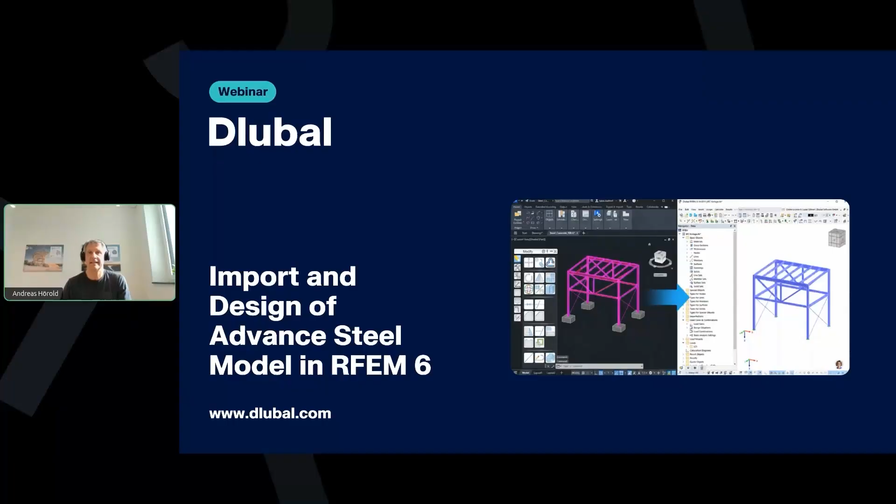Welcome to today's webinar. Today we will show you the import and the design of an Advance Steel model in RFEM 6.

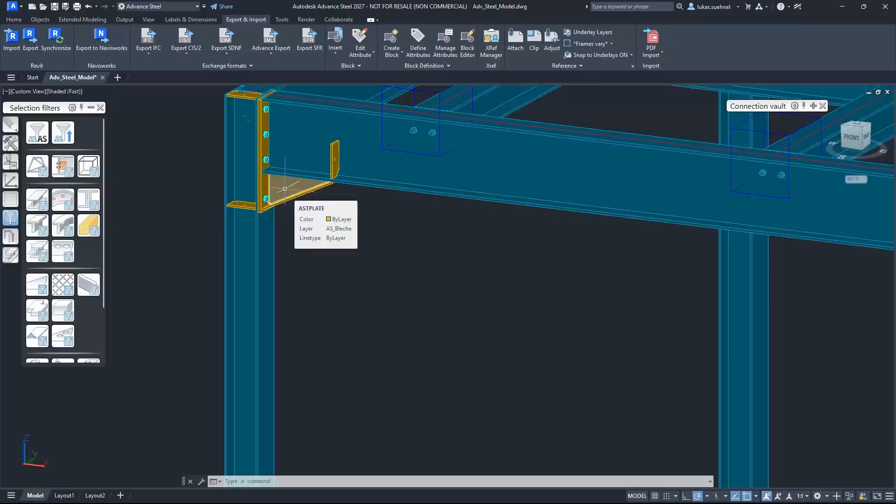The SDNF format allows us to export the beams, columns, so members in general, but it also allows us to export plates. So plates like here that are used in this tapering, in this connection, or here as stiffeners and so on. The question is, do I really need the plates in RFEM 6? And if I think a couple steps forward, I import this data into RFEM 6. I want to do an analysis on a beam model, then those plates won't help me at all.

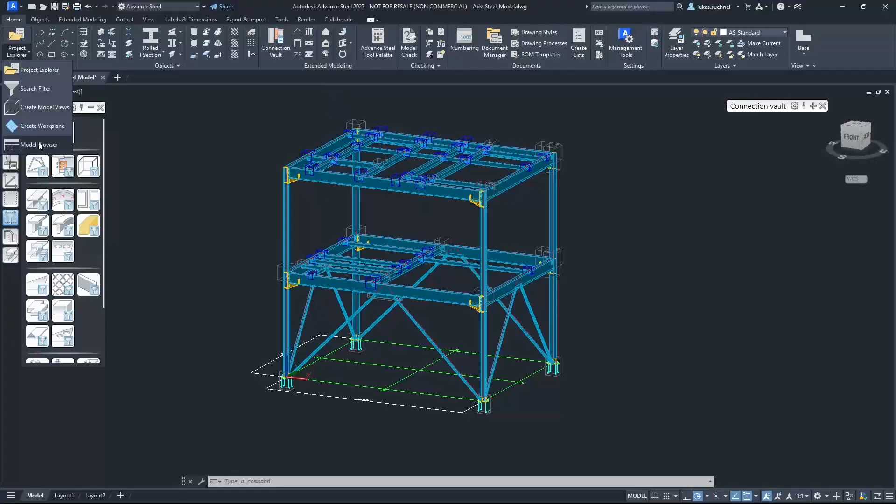Yeah, there's no benefit in having a surface here in that area. Therefore, I will not export any of the plates. I'm only interested in the beams. So to reduce this structure, so that it shows me only the beams, I can use, for example, the model browser. For example, sort by cross-sections, and then just select all the beams with the cross-sections that I'm interested in.

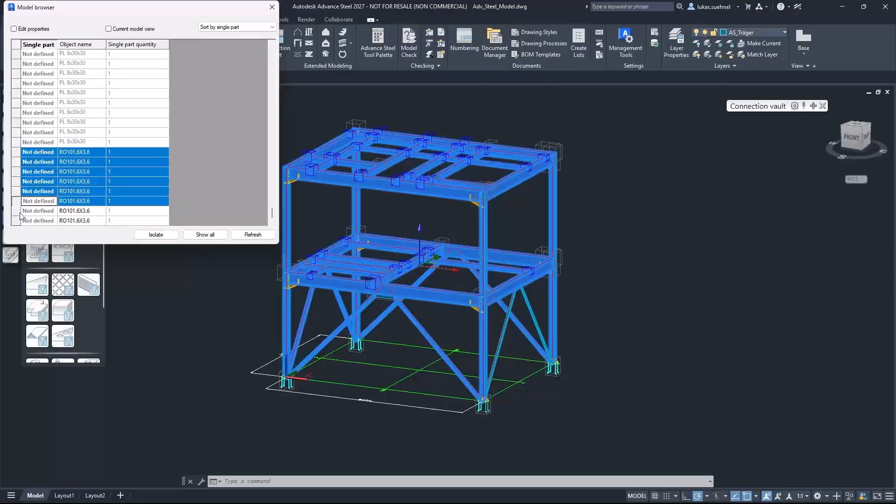And then we have a couple down here, I think. Yeah, those ones here, the diagonals, and then isolate them. Okay, so now all the connection details are hidden. Only my beams are visible, the ones that I want to export. Now I can select the structure and I can go to export and import and say export SDNF file.

Let me put it on my desktop. Advance Steel model tests. I don't know, anything. And then the SDNF version 3. Here I can choose whether I want to export only the selected model or the whole model. So I'm going for the selection only and press OK. The export is running, as you can see on the bottom right.

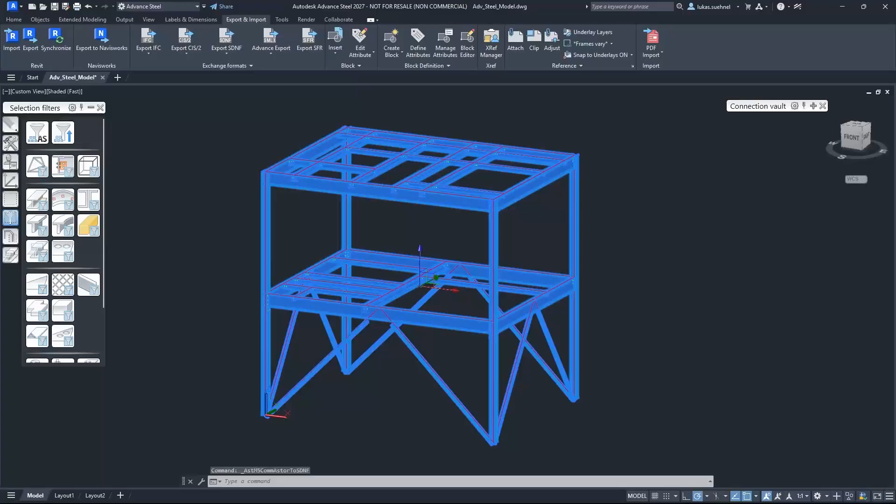And now it's done. And now I can go into RFEM 6 and run the import. Quite straightforward. File, import, SDNF. That is my file. And it will always take a couple seconds.

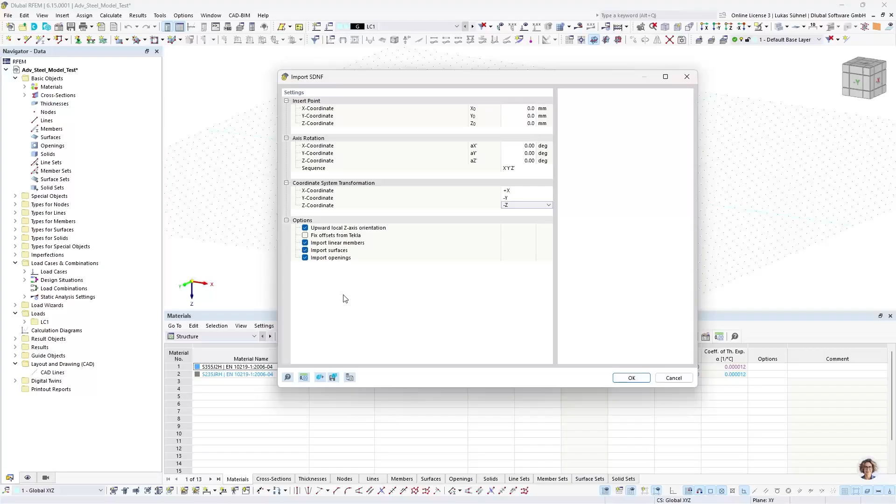All right. The first thing that I will do is I will mirror the coordinates. I will mirror the Y and the Z coordinate, simply because we are usually going with global Z downward in RFEM 6, and in Advance Steel, global Z axis is upward, so everything is mirrored. So to have my structure not upside down after the import, I mirror it in advance. And then I can control here what should be imported, and I go for everything, kind of. Click OK.

And now I have to deal with the cross-section and material conversion. You can imagine that materials, but also cross-sections are named differently in other programs compared to RFEM 6. What will happen is the following. You will get these tables, and if you do it for the first time, only the left side will be filled with the names from the external materials and the external cross-sections. So this is imported from Advance Steel, and the right side will be empty most likely.

So your job would be to assign a proper RFEM cross-section to the imported section name. So you can go for IPEs according to Eurocode or IPE according to any other code. So you have to be more specific here. Anyhow, you do it only once. Those section names will be saved. So when you do it the second time, you just click OK, as I do it here. I did it in advance.

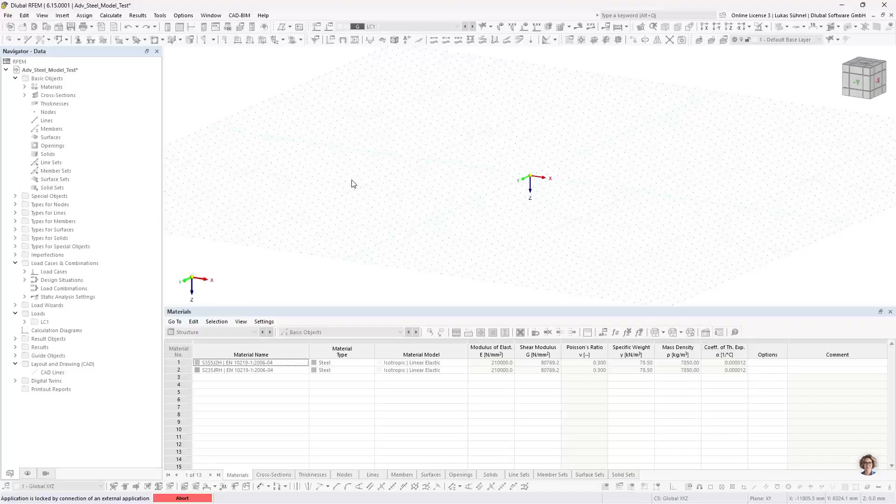So the import is running now. And there is my imported file. All right. Overall, I think it looks similar to the Advance Steel model. Now we have all the beams and diagonals. And what are the first things that I do after an import?

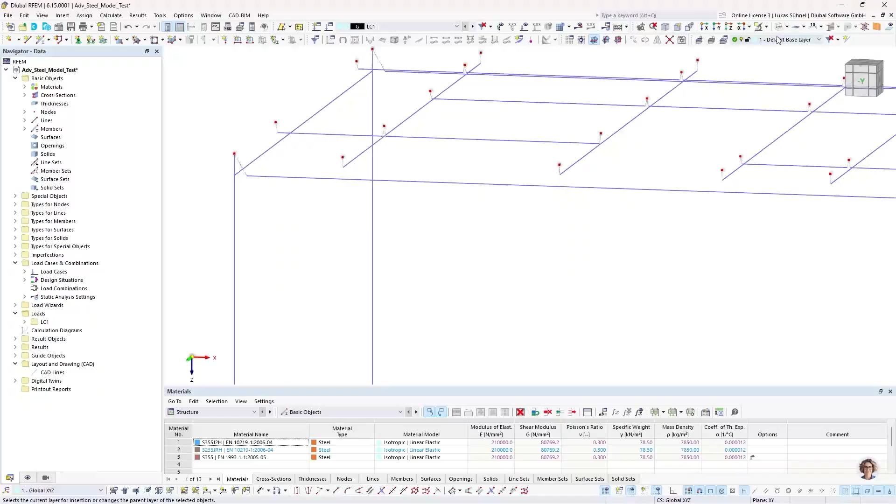First of all, what I directly notice is if we take a look at the wireframe model, then we can see there are many eccentricities assigned to our members. So if I show the rendering, it looks really nice. We even have a little gap in here between the beam and the column, and this is coming from the physical model from Advance Steel, because we have here an end plate in between, and on the bottom there was this tapering. This is what the eccentricities are coming from. Let me show the Advance Steel model again.

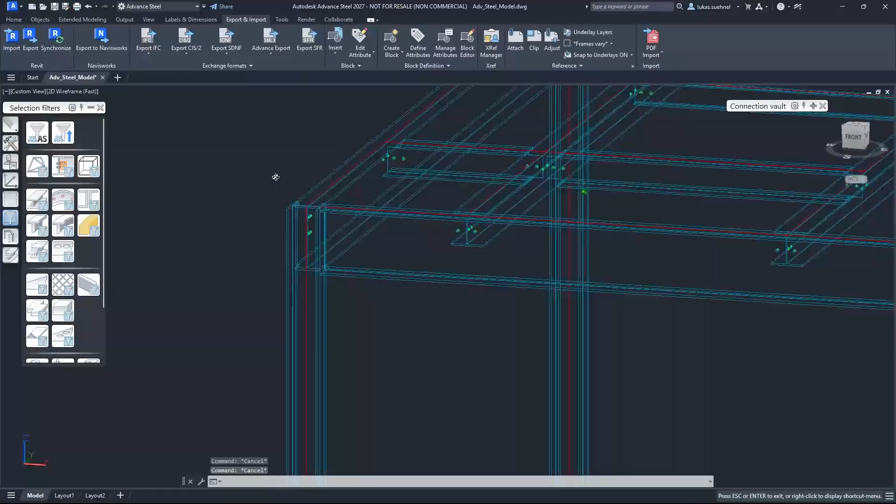So what we are exporting from Advance Steel into the SDNF format is related to the red lines that we can see here. These are the, I don't know, baselines of the members, let's say. I'm not sure if that's the official name in Advance Steel, but it's the baseline of these members, and they are all connected here, as you can see. The physical model in Advance Steel, however, is not intersecting. The beams are ending where they should end, depending on which joint you assign here.

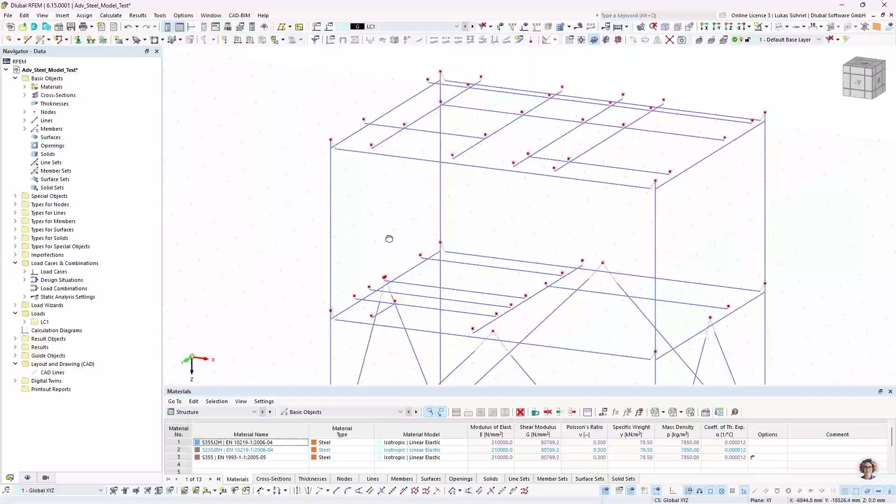So the SDNF format contains the coordinates of the baselines, and then the eccentricities are simply the result of the eccentric location of the beam compared to the baseline. Same here on this first floor, baseline on the top flange, and then the eccentricity vertically and slightly horizontally due to the joint. Now, if we think about it, going back into RFEM 6, I actually don't want to have the eccentricity in my model.

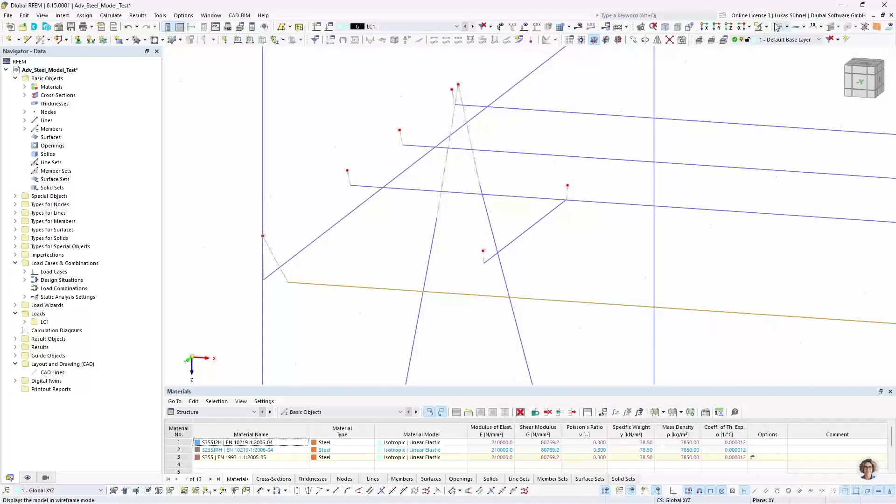Why is maybe the question. Well, imagine you have an axial force in this beam here, it would lead to additional bending moments in the column because of the eccentricity. Axial force multiplied by the lever arm. In reality, there is no such eccentricity. There are no additional bending moments in this area. So it doesn't make sense to use the eccentricities here. So therefore, I will go to types for members and remove all the eccentricities.

Now, if you want to be 100% correct, you would now say, okay, but now the beams are on a higher level compared to the physical model in Advance Steel. So what you obviously can do is you can always go to these coordinates and change it to the appropriate level or appropriate height. You can modify that. For the sake of the webinar here, I will just skip this little adaptation in the model. Okay, that's the first thing.

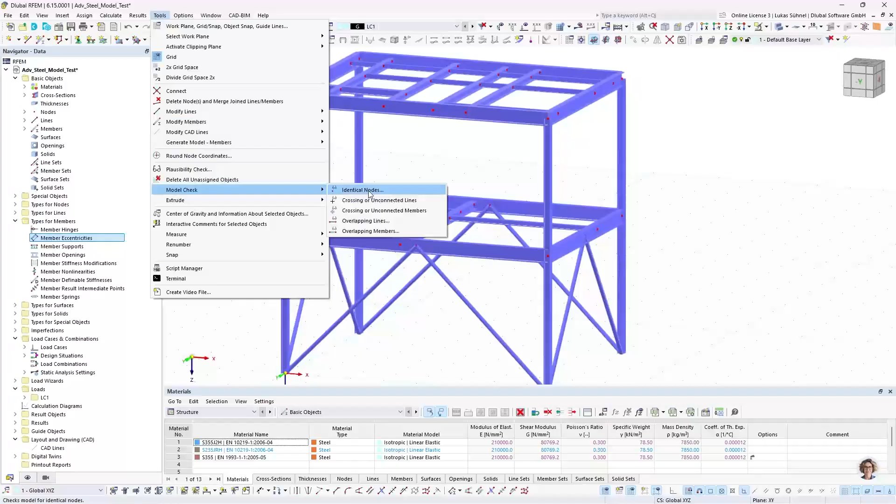Then what else am I usually checking? Well, we have in RFEM 6 a lot of model checking features. You can find them in the Tools menu, Model Check, and here you can check for identical nodes. Here nothing will be found. There are 0 groups. That means there are no identical nodes. It's however a good check to run.

Identical nodes doesn't mean they are 100% lying on top of each other. There could be even a small distance in between. And let's say there are 2 nodes that have a distance of 1 millimeter. Usually that is a modeling error. That's not supposed to happen. And this would be shown via this check, and then you can directly see where maybe members are not really connected. Another check could be overlapping lines or members.

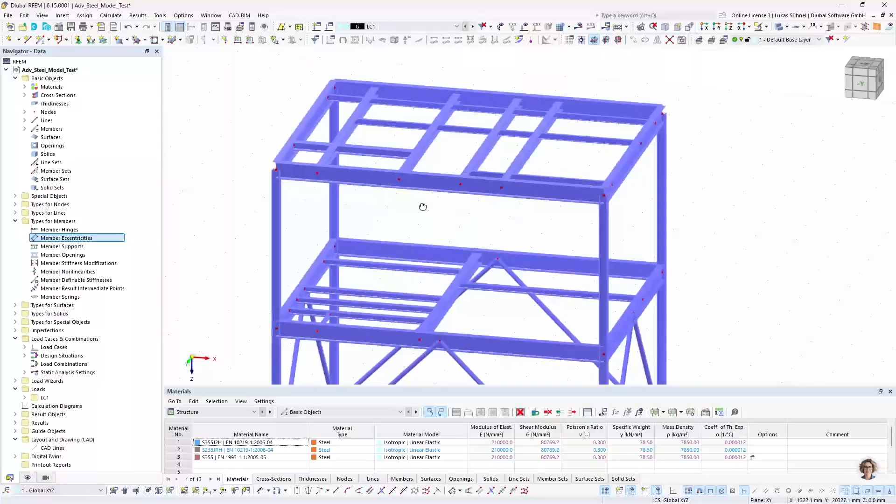No overlapping members were found here. What is this check good for? Well, assume you have multiple members on the same location in Advance Steel. Maybe you don't see that directly. I don't know how Advance Steel shows that, if there are 2 members with the same section in the same place, if there's also a model check or not. But if you would export that and you get double members in RFEM, then that's not ideal. So overlapping lines and members will check for that.

And the last one that I'm running here is crossing or unconnected lines and members. And this will show us some, I don't want to call it issues, but some locations. And you click on each group individually. You can see, for example, this member and this member. They are both highlighted now. And this is like a crossing unconnected member.

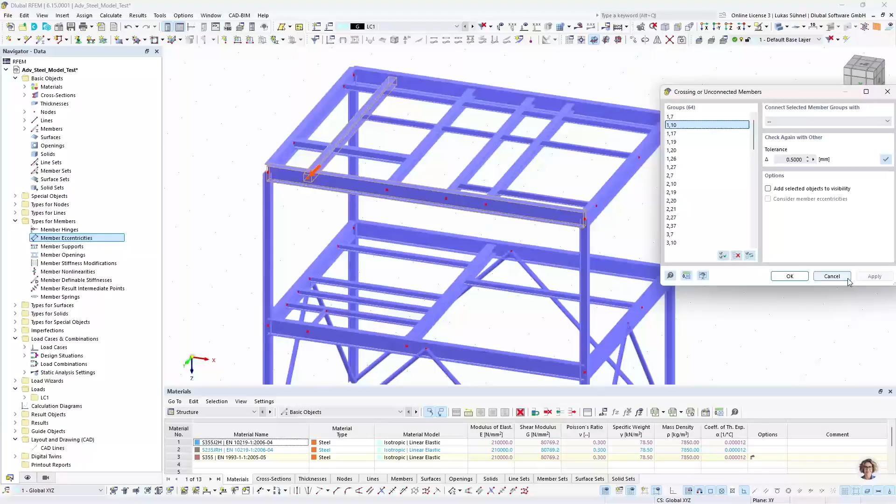And that simply means that this member is going from this node to this node, and this member is lying with its end node on this member. But since this member is not divided, it simply shows us, hey, there's an undivided member where another member is placed on top of it. And while for the static analysis this is not a big issue, if I run an analysis now, these members will be connected. In our steel design or other design add-ons, this is not ideal, let's say.

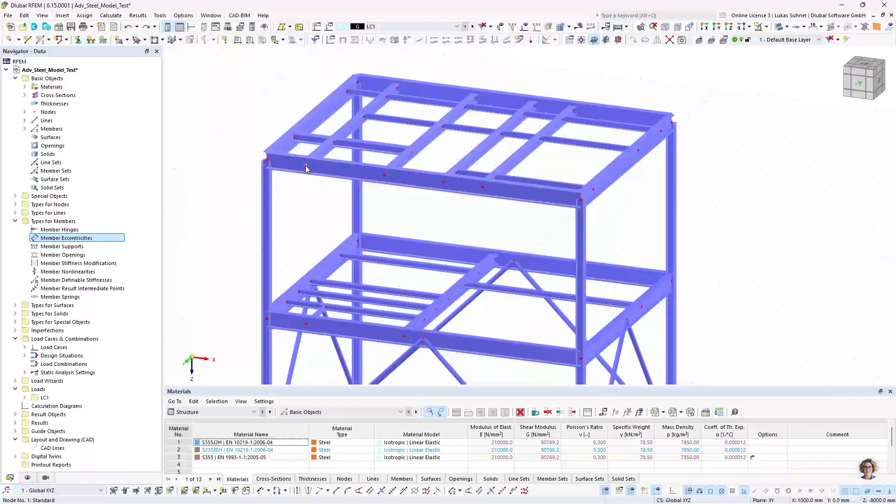So if you have such a model where there's a beam connecting to another beam, you have 2 options usually. You can either connect lines and members, so you really split them up. Let me do it once. Now this member ends here, this member ends here, so they share the same node and they are fully connected. That's one option. The other option would be to leave this member over the full length, but use another type of node instead. So instead of these red nodes, we could use nodes with the type on member.

So let me do this change. I select all of the nodes except the nodes on top of my columns, because those are real end nodes, and this one. And now I can modify all the other selected nodes by simply double-clicking on them and say here on member. So after this modification, you can see the color switch to blue. And now this is a proper definition of 2 members connecting each other. This member here has now information about those nodes lying on it.

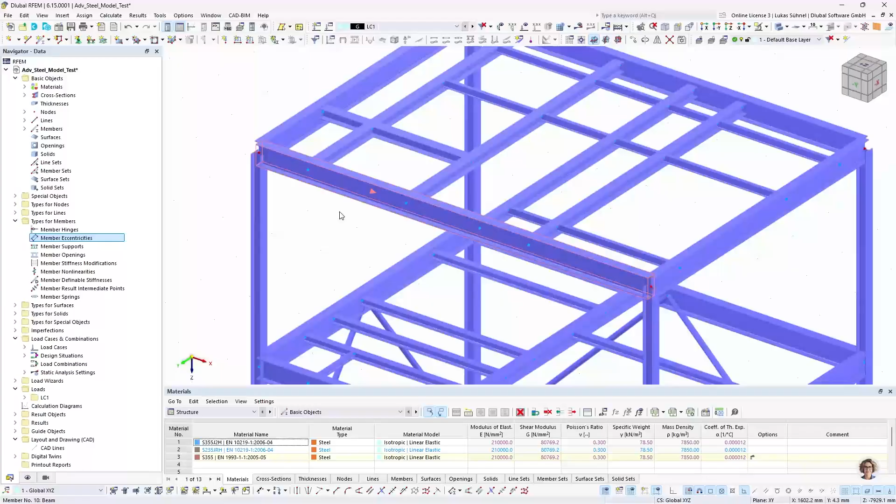You can also see it if you open the Edit Member dialog. You have now a tab, Nodes on Member, and they are all listed here. And this is a better way to model it. Okay, so far regarding that. Last thing that we could check is maybe cross-sections and materials in general. It's always good that we know the conversion worked properly.

So I can go into my display navigator, into colors of rendered objects by object property, and then, for example, cross-sections. So all my cross-sections will be rendered in different colors. And with this information from the panel, you can quickly control if the right sections were assigned. Same for the materials here, everything is S355, and so on. So those are the checks that I recommend in general after importing any kind of data. It helps to prevent issues.

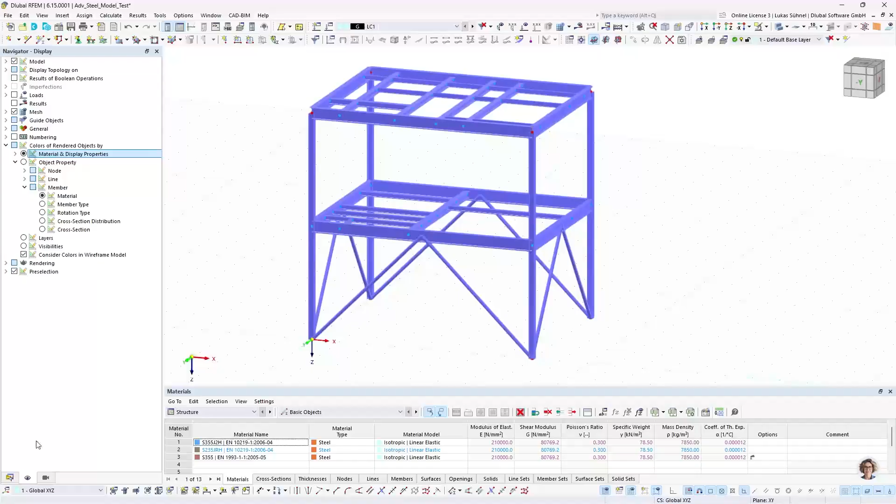Let's continue. What else do I have to do? I have to support the structure. I have to apply some loads, obviously, and then we can slightly think about the analysis and design. So regarding the support, I will simply use nodal supports on the bottom here. 4 nodes. Okay, we can increase the size a bit so it's more visible.

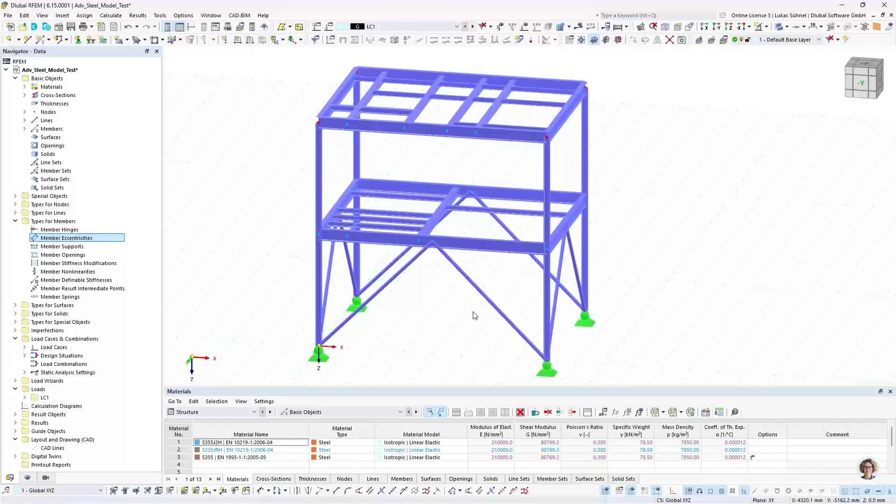And the next thing that I have to think about is the analytical model, the connections of the beams. Currently, every beam is modeled or imported as a beam type. So every internal force, every bending moment will be transferred to any other member.

That means a bending moment in that beam will be a torsion in this member. This is not ideal. Therefore, I want to assign some hinges.

Since many of the beams are typical truss members, they have a hinge for bending moments at the start and at the end, so I can use a specific member type.

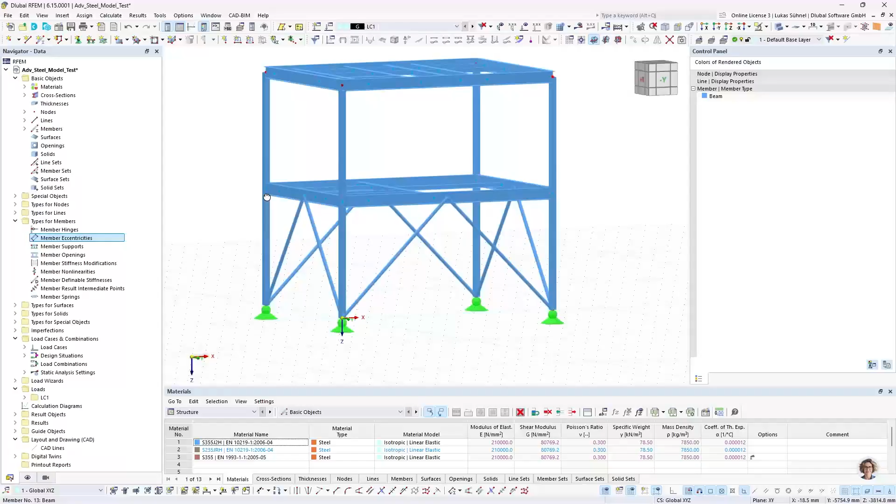Let me select all of the members. I'm thinking what would be the fastest way - let's just do it graphically. So I select all these diagonals and all these crossing members in these levels, and additionally also these members here.

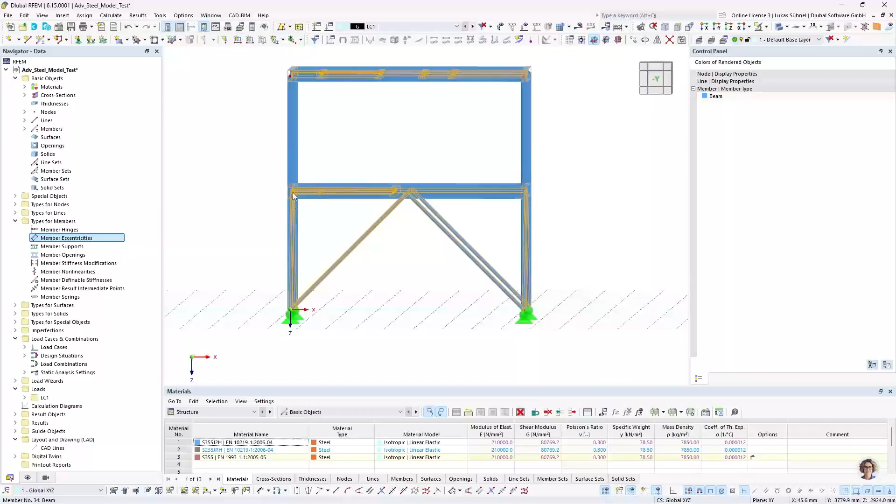In that area we had rigid frames, and in the other direction there were only, let's say, hinged connections. So I selected all the members that I want to modify.

I double click here, and then my member dialog should open. I will change it from beam, where every internal force will be transferred, to truss member. Then the graphic should update, so here only axial and shear forces will be transferred from this beam to the next beam.

All right, let's graphically check it. So rigid beams, rigid frames in this direction, hinged in this. Okay, so far so good.

Before we apply more loads and all these kinds of things, we could run a simple static analysis. There's always the dead load case active by default. We can simply run the analysis of that load case to see if the structure is fine, if it behaves according to our expectations, or if there's maybe an instability. So before we deal with the loading, we make sure the model itself is okay.

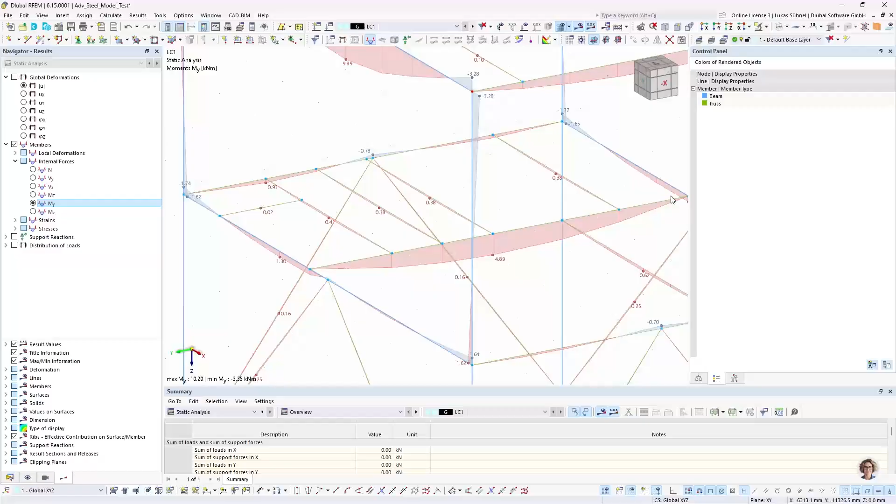We get deformations, so we get the results in general - the axial forces, bending moments. Let's have a brief look. The bending moments also look fine - we have single span beam-like bending moment in all of the truss beams, and for our rigid frame we have the right bending moments. So the general behavior of the file is fine.

All right, then let's continue with the loads and load combinations.

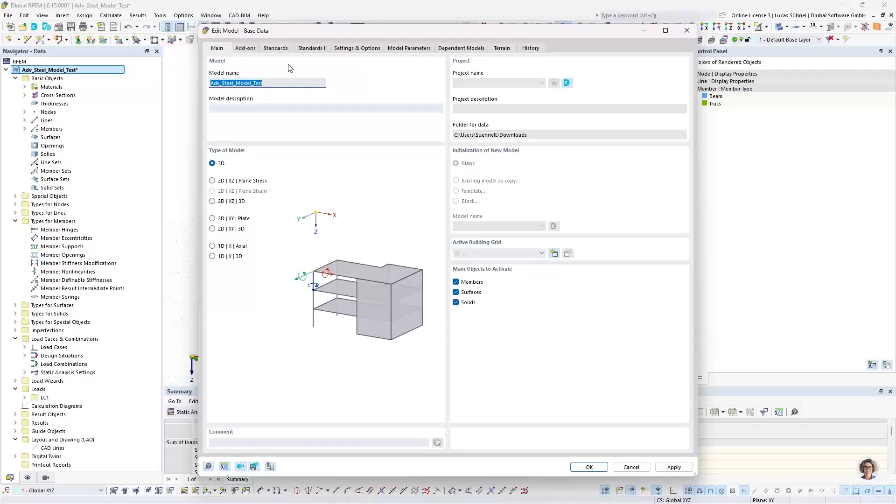Before we apply any load, we should check if the right codes are assigned. This file was created via an import, so I haven't even thought about the standards and national annexes here. Let's check that for the load cases and combinations - I want to use the Eurocode and let's say German national annex.

And for load wizards, let's assume we want to apply some snow or wind loads, I also want to use the German national annex, so the right snow and wind zone cards pop up. Okay, that is that.

Now we can create some load cases. Actually, I want to keep it very simple. We have the dead load case here as default, and I want to create exactly one more for the live loads.

Maybe storage areas, and then I can assign a load to it - I will simply place a surface load on top of this and this level. There are many webinars that show various loads, but in my case I want to keep it quite simple today, so I'm using the member load from area load generator.

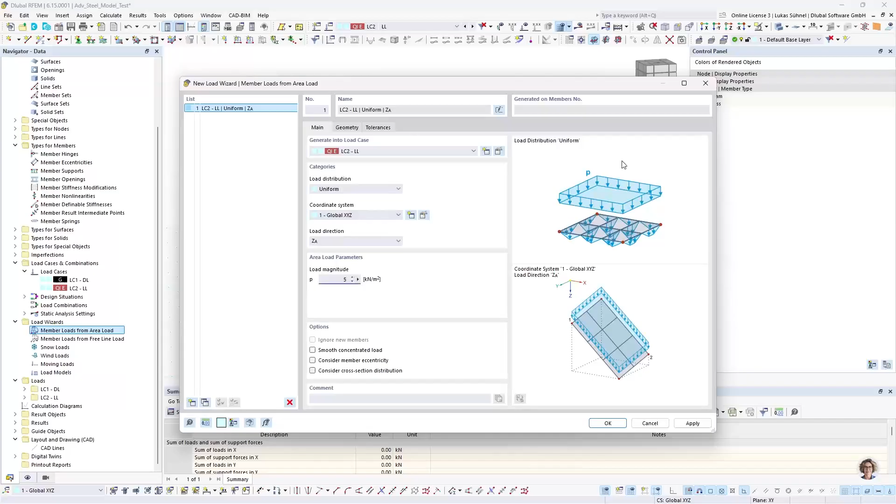So I can easily say, okay, I want to have 5 kilonewton per square meter in that area here. Let me select the nodes - so from here to here, to here to here.

So I left a little area open - there's a stairway, I think, from the bottom to this floor, so there's an opening basically. So this is the first load.

And then I create another one on the top of the structure, 3 kilonewton per square meter, same load case, and here I simply select the full plane. Okay, those are my loads.

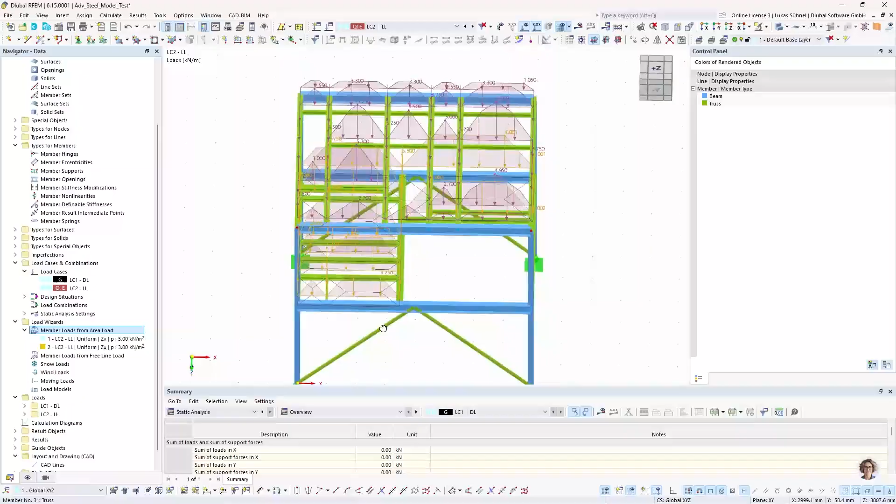I can also show them separately, as you know. It will also show the areas from the surface load, so you can see how the surface load will be spread to the members by these red, black lines here - distribution areas, that was the name. Okay, so those are my loads.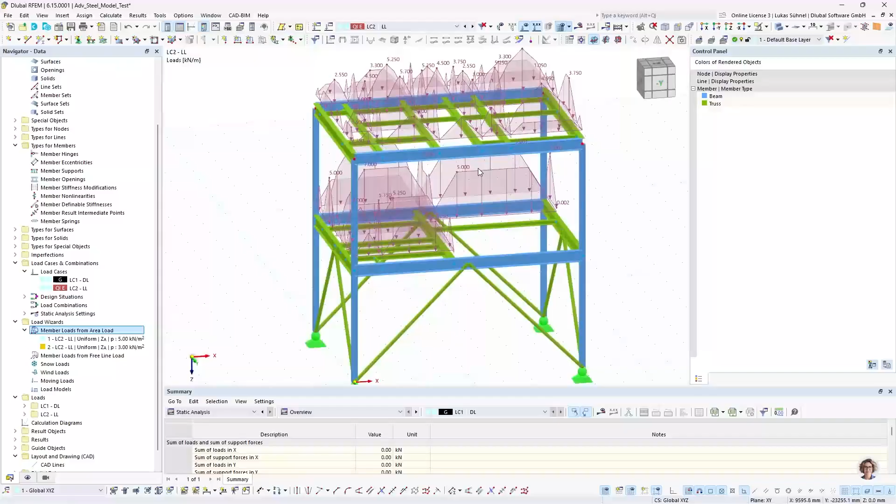Now, let's combine the load cases. We can do that either manually - I can manually say, okay, I want to have a design situation, permanent and transient, and then here manually create my load cases. Or if we activate the combination wizard, it will be done automatically.

Concerning the combinations, I'm only interested in the ultimate limit state for today, and then it will combine them automatically. Now let's have a first thought about the structure stability.

Before we even do any of the steel design checks, we can check the general stability of the structure by calculating the critical load factor. To do so, I need a specific add-on, which I will activate now. It's called structure stability.

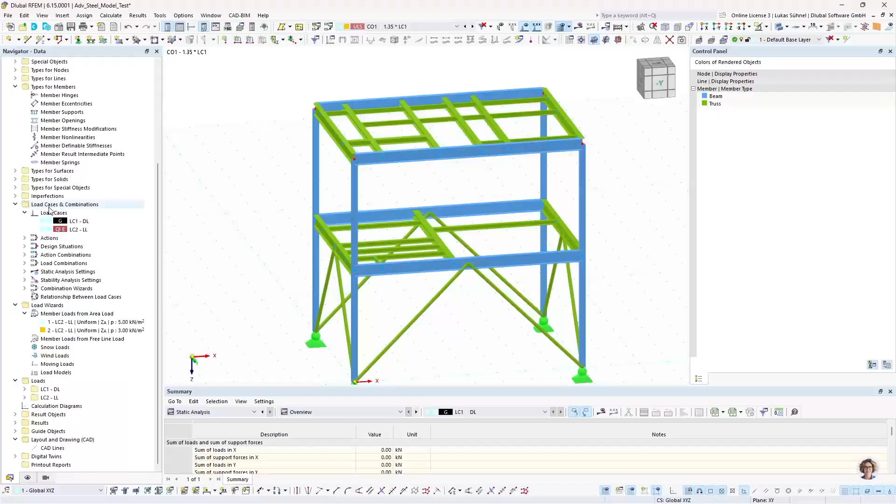This add-on will calculate the critical load factor, the eigenforms, the buckling length of the members, and so on. And I can control it, for example, within this combination wizard.

So I can go to my design situation, ultimate limit state, and then I have different rule sets for how my load cases should be combined. I have an option that they should be combined linear or according to second order, or I can even modify that rule set. I want to have in the beginning a setting where the load combinations will be calculated geometrically linear, but additionally a stability analysis should run.

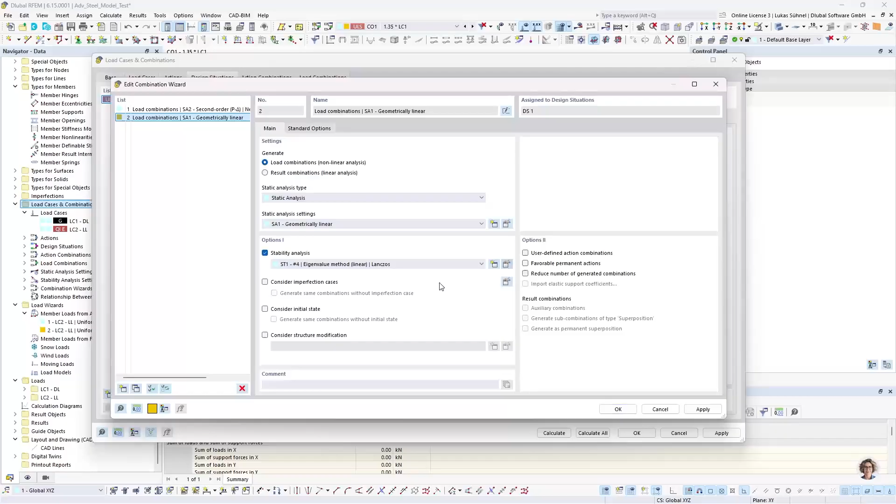For example, 40 eigenvalues should be calculated. So by assigning this setting to my combination wizard, all my load combinations, which are only 2 here, will have the setting activated: calculate critical load. So that is so far okay.

We can run the analysis. We can see it will calculate the static analysis of my load cases and combinations, and then it will run the stability analysis.

There are rules in the Eurocode that when the critical load factor is smaller than 10 for an elastic analysis, or 15 for a plastic or elastic-plastic design, then you have to use a second order analysis for the load combinations. If the critical load factor is higher than 10 or 15, you can actually use a linear analysis.

Now the question is, what is the smallest critical load factor in this structure? For us it's quite simple, we have 2 combinations we can check manually, but imagine there would be hundreds of load combinations. Then you can go into the static analysis, into the design situation here, and see the minimum critical load factor of 2.3 is resulting from combination number 2.

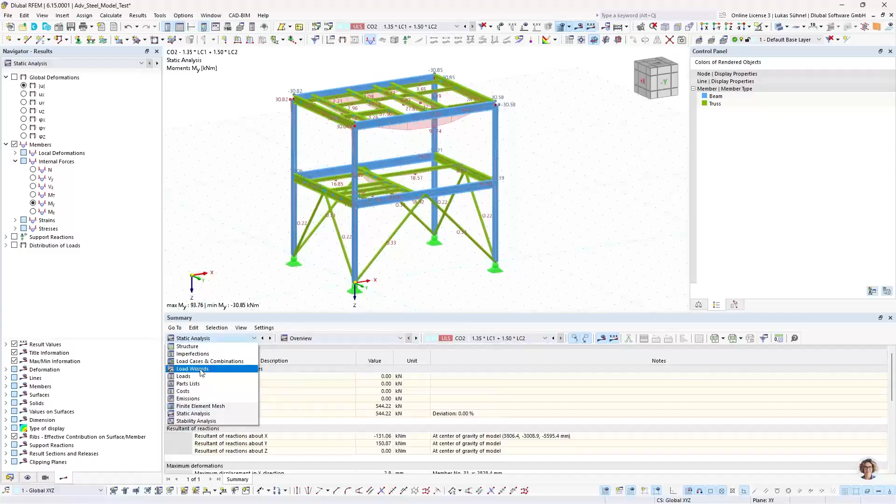So we can have a look at combination number 2 results and also the stability analysis results. We can, for example, display the mode shapes. For a better rendering, I will display them as colored sections.

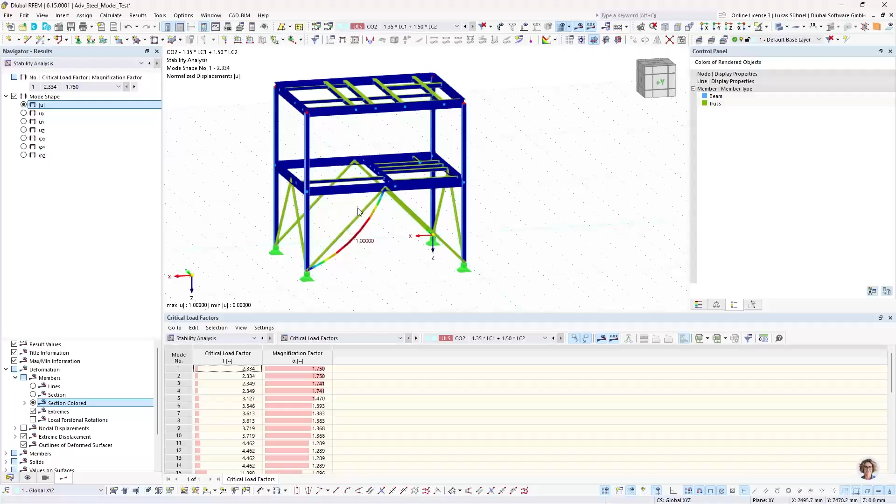So the first information we get from here is the critical load factor is below 10, so we definitely have to run a second order analysis. The axial forces will cause or have a huge effect on the bending moments because the beams are so slender, basically.

So let's have a look at the shapes. I can go through each critical load factor here. This is all local buckling of my diagonals. And then still with a very small critical load factor, I have a global stability issue, as you can see here.

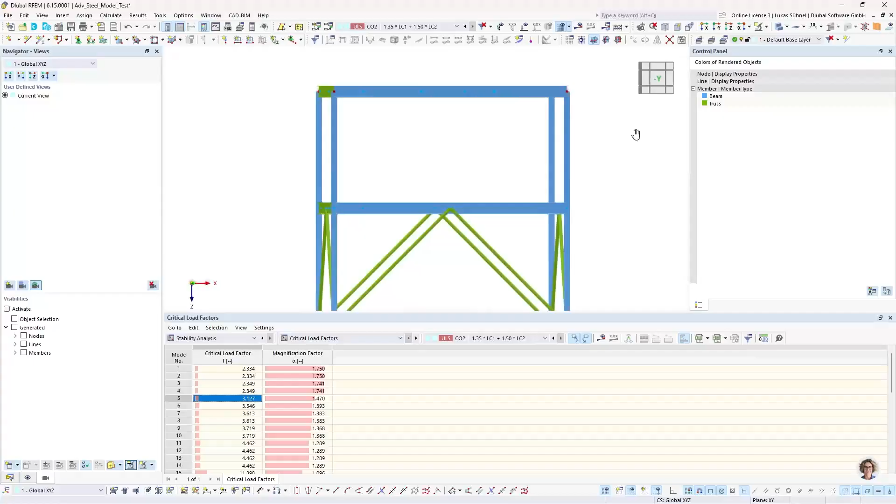It's an asymmetric buckling of my columns. If I check the following critical load factor, it's symmetric buckling of my structure, so the columns will all fail in this direction. I think it's kind of logical, because in the upper floor we have, as I said, a rigid frame in this direction, but in this direction everything is connected via hinges, so no bending moments transfer.

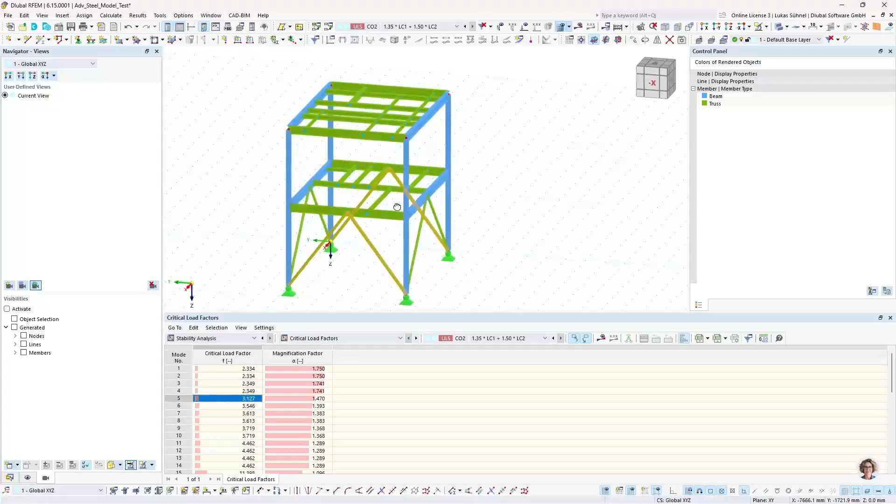So it's really not very stable. For this floor it's okay because of the diagonals, but here we do not have them. So to optimize my structure regarding stability, I would simply decide we definitely need these diagonals also on the bottom floor and the upper floor.

I copied them using drag and drop. Drag and drop: just select the objects you want, keep Control pressed, and then move it wherever you need them, and then they will be copied.

Let's not forget about the red and the blue nodes. I have red nodes here now, but again, I can simply change them to 'on members', and then they are properly connected to the other beams.

That is my first modification of the structure. I optimized it to try to deal with the global stability issues. So let's run the analysis again: static analysis and stability analysis.

Okay, now let's have another look at the critical load factor. It's still small, 2.3, but this is still local buckling of the diagonals, I assume at least. Let's see.

Now let's have a look at the eigenmodes again. So still local buckling, obviously. I didn't change anything in that regard. But if we go through the mode shapes, there is no mode shape that shows the global stability issue. It's all local buckling.

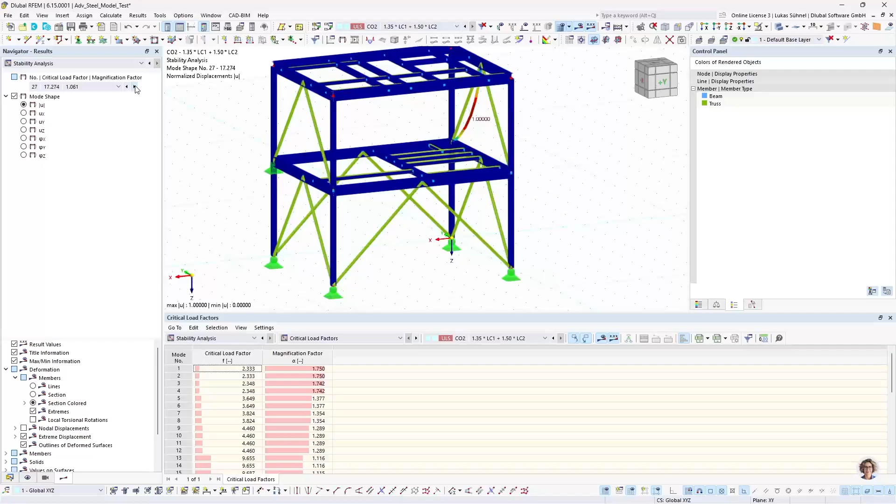Let's continue, maybe another shape will show up or not. Here's the first, let's say it's still a local buckling shape of the column, but the critical load factor is 20, so this is maybe not that serious. Anyhow, we can nicely see that buckling of columns in that direction will be sinus shape-like. So it's not buckling over the whole length, it's like a sinus curve.

All right, so my global stability issue, I think I controlled or optimized at least. And now we can really think about the steel design of the beams according to Eurocode 3-1-1.

How do we check that? First of all, we need the steel design add-on. This is what we need for designing steel beams according to EC3.

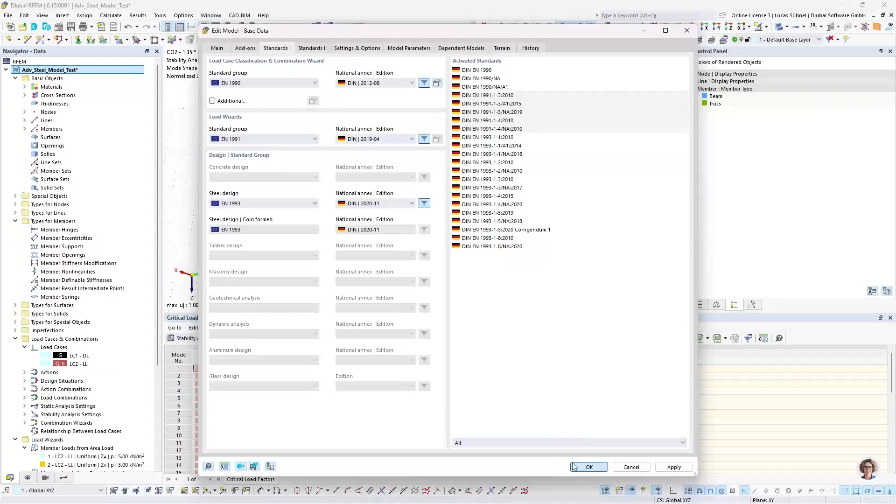Let's remove that. Now we just noticed that we have to run a second order analysis, right? The critical load factor was below 10. So let's modify my combinations again.

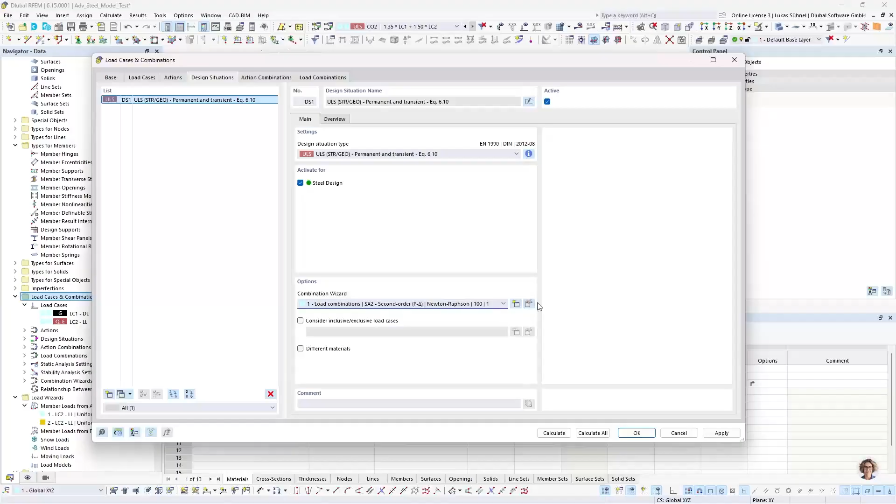Instead of running using a rule set that combines load cases according to first order, or that creates load combinations that will be calculated according to first order, I will switch it to the second order rule set. So my load combinations will be analyzed according to second order analysis.

My stability analysis is also turned off, I don't need it anymore right now. So these load combinations are now calculated according to second order analysis.

Now, before we start with assigning buckling lengths and so on, we have to think about which rule we are using for the steel design. The Eurocode gives us different possibilities, and if you have the Eurocode open, in chapter 5.2.2 in bracket 7, there are three different variants, and I summed them up in my PowerPoint here.

So let me briefly show it. So there are different methods. Again, Eurocode 3-1-1, 5.2.2 in bracket 7.

There's method A, which basically states that if you consider the global and the local imperfections in your static analysis and you run a second order analysis, then there is no need to run any stability check according to chapter 6.3. You can simply run a cross-section check, and if the cross-section check is fulfilled, then also your stability or the stability is checked by that.

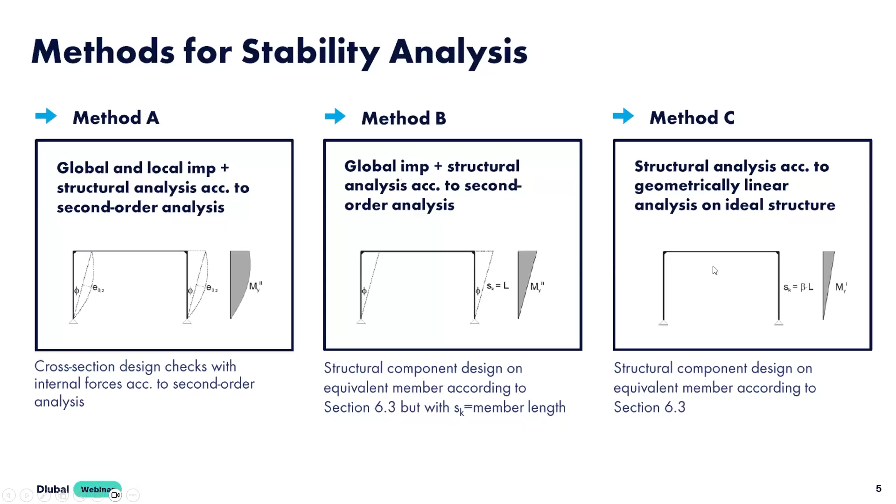So let's go back into RFEM 6. And for method B, I need a second order analysis, which I just assigned before. I need the global imperfections, so the inclination of my columns here, and that can be done with the imperfection cases.

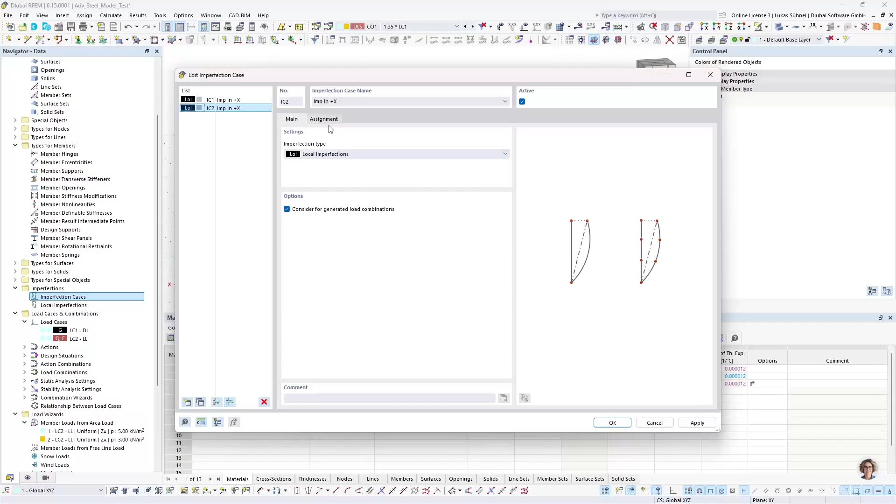So I create two imperfection cases here. Imperfection in plus X, maybe, and I make a copy in plus Y. All right.

So these are like load cases just for imperfections, and then I have to fill these imperfection cases with imperfections itself. And it can be done in various ways. There's the imperfection load for members. And here I can simply say I want an initial sway based on the Eurocode 3. So I have a base value of 1 divided by 200. You can always use that.

But if you want to be a little bit more economical, you can assign as well the structure height here, maybe the amount of columns in the same row, and it will increase, which kind of means decrease the initial sway of the structure, simply because it's quite uncommon that all of the columns in one row will have the same inclination in reality. Every column probably will be measured by itself, and it's not that common that you have an inclination for all of them at the same time.

So, and I can assign this initial sway to my columns. I simply select them, and let me change something. The imperfection direction is minus z. Minus z will be plus x, as I hopefully intended. So now all of my 4 columns have this global inclination in plus x direction.

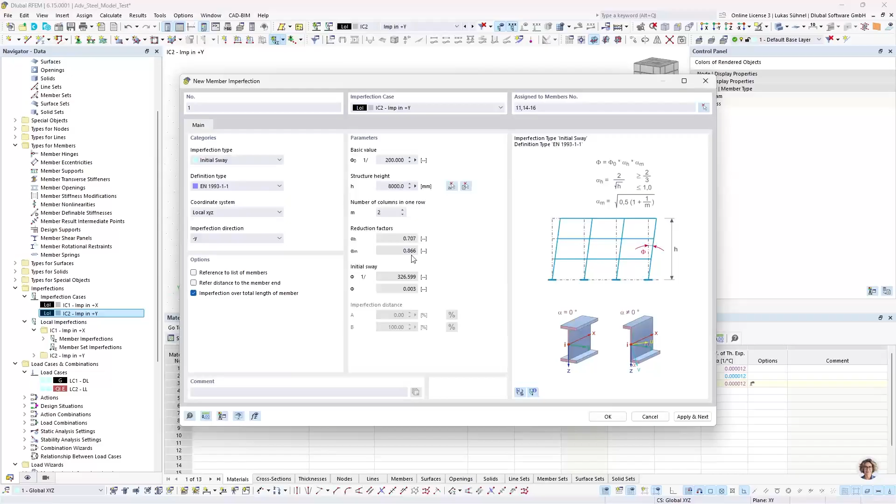Same I will do for the imperfection case in y. We do it rather quickly now. Initial sway, EC3 minus y, same values. All right. In plus y direction now. It depends. It's of course not really perfectly symmetrical, this whole structure. So you can also think about minus y and minus x. I skipped that here for the webinar.

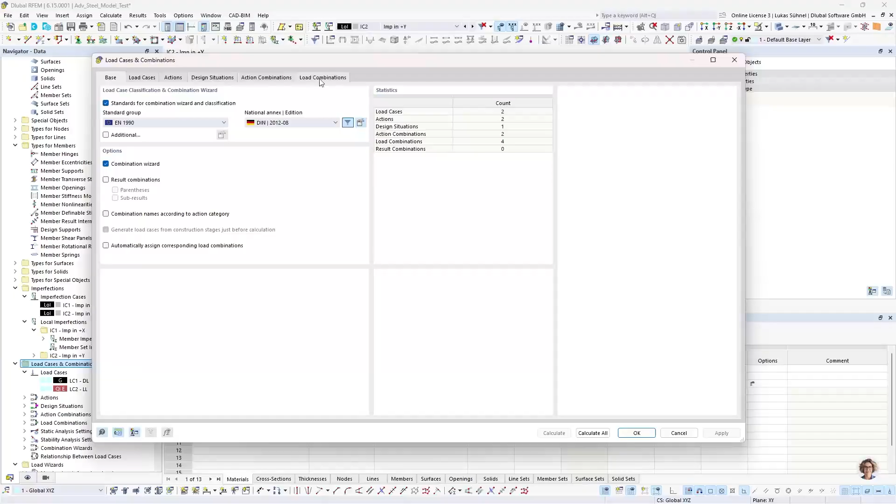All right. So I have my imperfection cases. Now, obviously, I need to consider these imperfections in my load combinations. This is, however, already included in my combination rule. So I have now 4 load combinations, and every time the imperfection switches. So load case 1 with imperfection x, load case 2 with imperfection, load case 1 with imperfection 2, and same for the other 2 combinations.

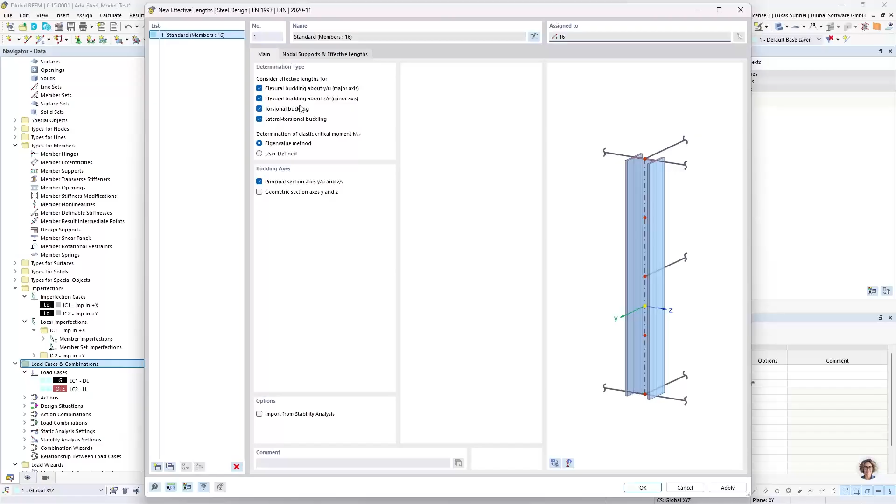All right. And now the last thing that I have to do is I have to assign my stability related information or properties to my beams. And let's start with the columns. There are, again, different design checks that we can use. In my case, I want to use the equivalent member method kind of. So I can, for example, modify or edit a member, go into the design type tab, and here you can assign effective length types, basically. So I create one of these types. All these stability issues should be checked: buckling, torsional buckling, lateral torsional buckling. And then I have to deal with the settings in here.

Let me close this dialog one more time because I want to show the structure at the same time. So I move this a little bit to the side, like this. And now I have to define basically how this column is supported for the internal eigenvalue method for the determination of Mcr, which we need for the lateral torsional buckling check. So the default setting is that we have a fork supported beam. So a support at the start and at the end of the column in this case.

We don't automatically detect any additional supports. So if you want to consider them, you can select simply the beam itself, and it will tell you, hey, there is an additional intermediate node. And how should this one be supported? Well, in both local Y and local Z direction. So for buckling in Y, we have support by this crossing beam, and in buckling about Z, in Z direction, we have the support of this beam. This is what I'm defining here.

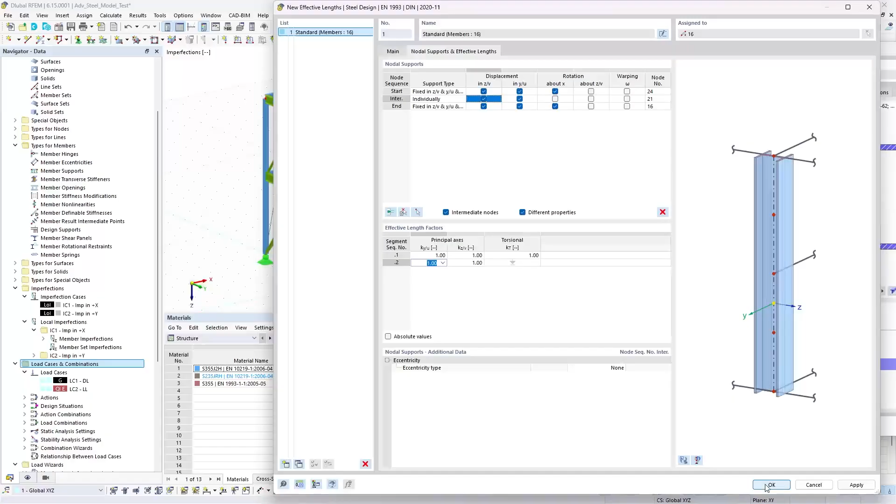And then I will get segmented, like 2 segments for my beam. And for each segment, I can decide what is the buckling length. In my case, I simply say buckling length factor is equal to 1. So buckling length is equal to member length or segment length. All right, then I can press OK, or maybe even assign this type that I just created to all of my columns. Yeah, I forgot that I did it only for one column. I can say this is the same logic that we use on all of the columns.

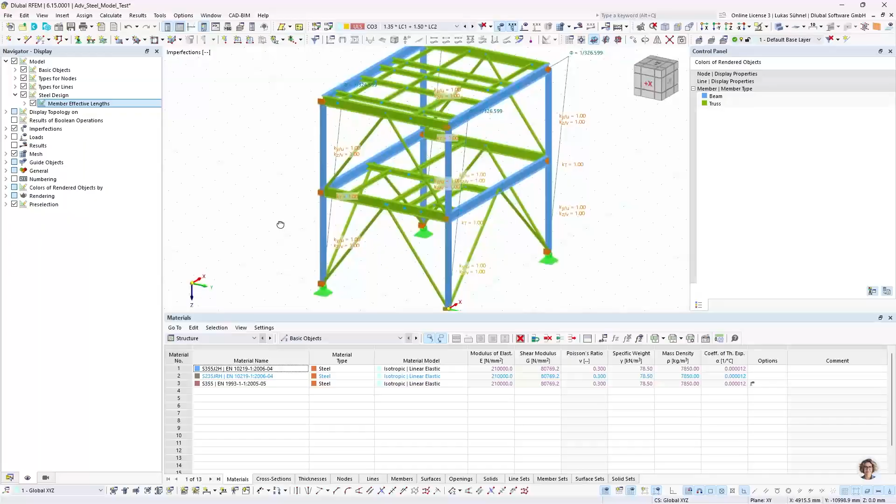And now let's double check that the support that I defined is on the right location. We can do this again in the display navigator, and we can say here, please show me the effective length supports basically. And we can see that the support is directly there where I have the crossing beams. So that's nice to check it graphically. So these are the necessary settings for the columns. Now we can continue with other beams.

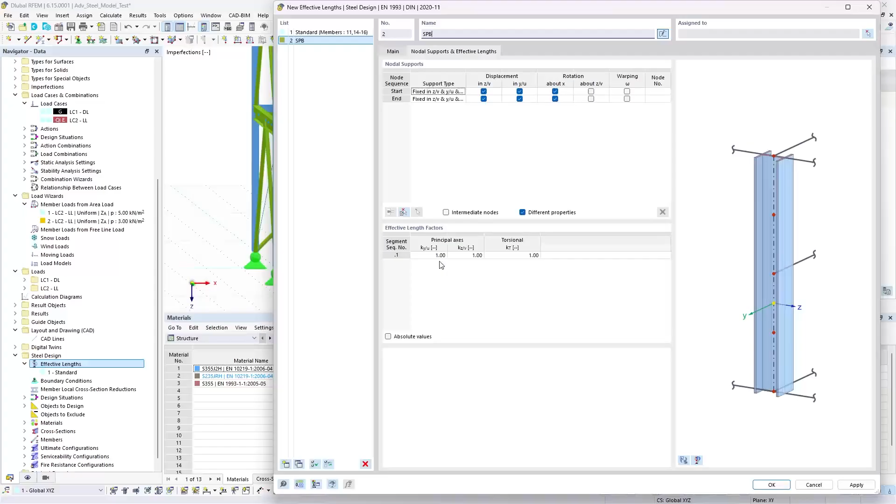And one really common case here are these truss members. They're like single supported, fork supported beams at the start and at the end with no intermediate supports. So I will create one more type for that. We can call it, I don't know, single span beam, or however you want to name this type. And it's basically fork supported on both sides, and member length equals buckling length.

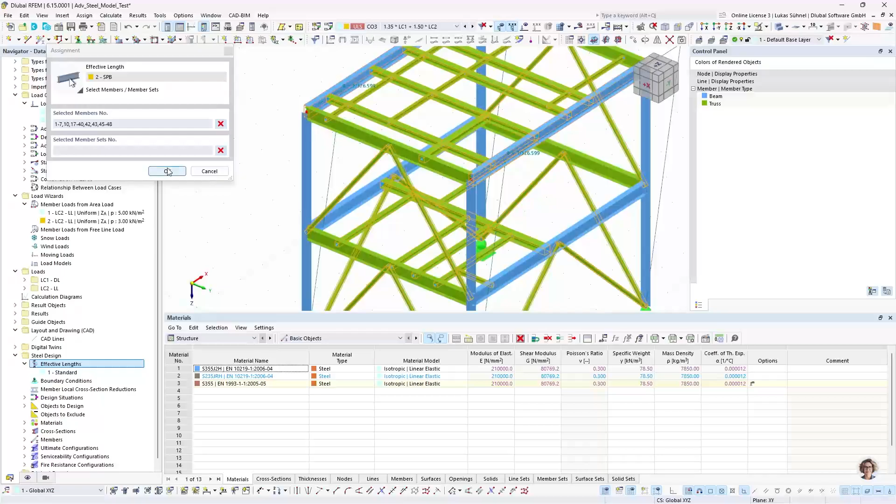And I can assign this type to many of the beams here in my example, all of the diagonals, obviously. And then I will select also all these beams, and I will explain it in a second. And also these two main beams here. Okay. So what is my idea behind that? Well, I think it's easy to understand for these diagonal beams, and maybe also for this one here and this one and so on. But now we could argue about this beam here, this crossing beam. It is, of course, supported on both ends, but maybe there's an additional horizontal support by these inner smaller crossing beams.

And my idea is, let me first check it as single span beam. If the design ratio for my stability check is not okay here, if it's above 1, then I can still think about assigning additional horizontal supports. If it is okay, then maybe I can live with that. Maybe it's conservative, I'm on the safe side, maybe not that economical. Well, it depends if that's necessary or not.

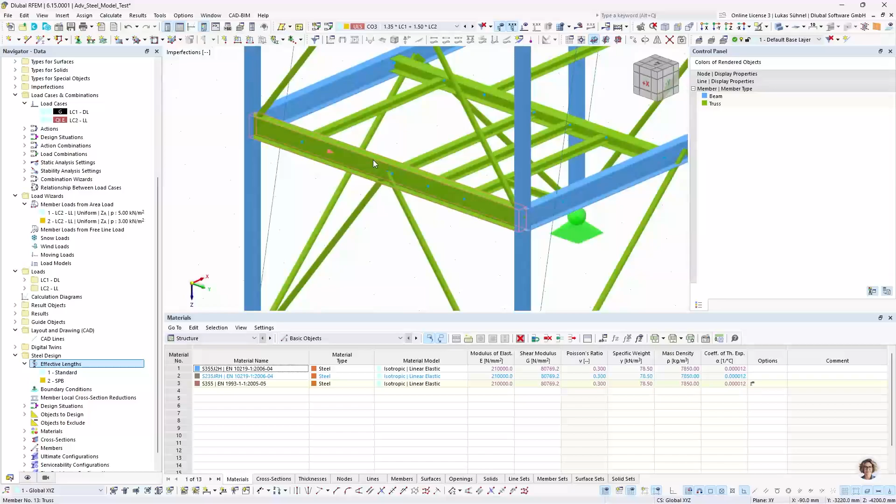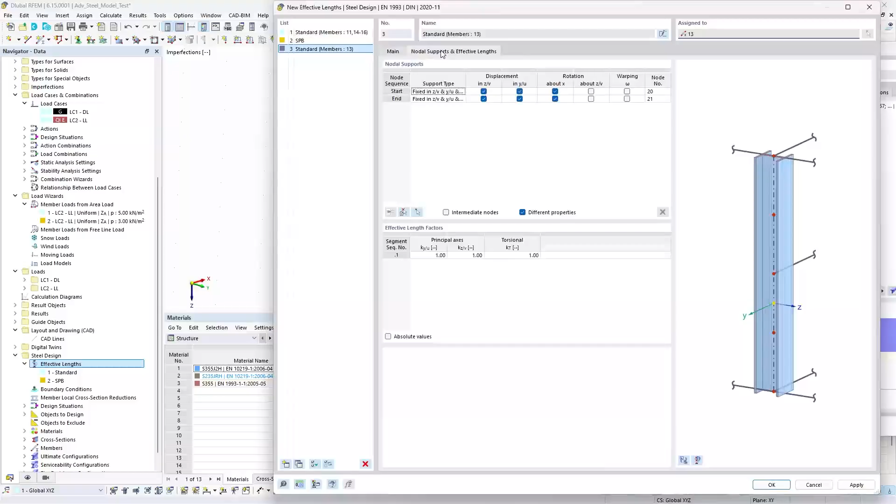All right, and then I have a couple more beams that have no settings so far. For example, this one here, there's definitely a vertical support on that node, same here, and on other locations as well. So I need one, or actually two more of these types, and I will start with this one here. I will do it inside the member one more time. So I'm creating one more equivalent member length method. I will import the amount of intermediate nodes via this button, as I showed it in the beginning.

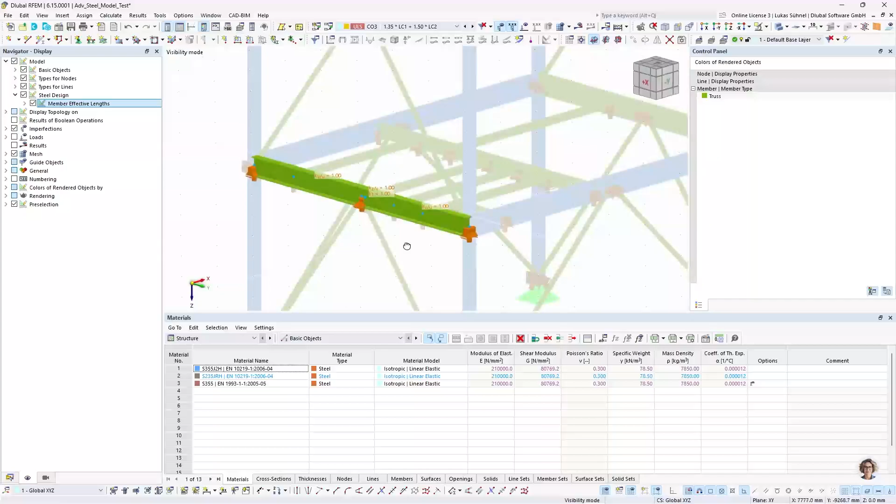And here it's visible on the second node, there is a vertical support. So I select that, and I again do not consider any of the additional horizontal supports or crossing beams. Just the vertical one here for now. Let me show if it is assigned correctly. I will show only one member, not all of them. And we can again see it's supported on the right node. And now I will assign this type to other beams as well.

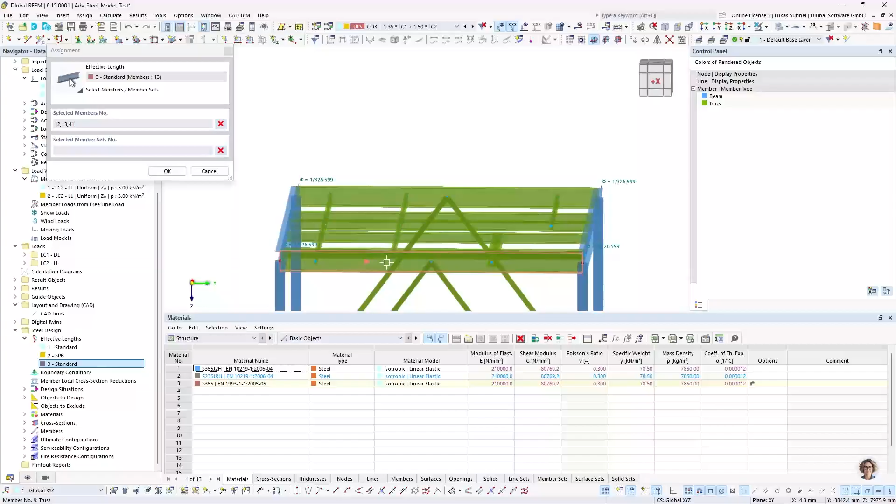So, oh, actually, sorry, my bad. The type itself. So this beam here, it's always the second node. This beam is supported not on the second node, but on the third. I need a different setup for this one. Here it's the second node again. It's also the second one. Sorry, I will change the rendering so it's more obvious. So this one as well. And it's the third one, as I said before. And here it's the second one. Okay. So how do we call it? Second, because of the second node.

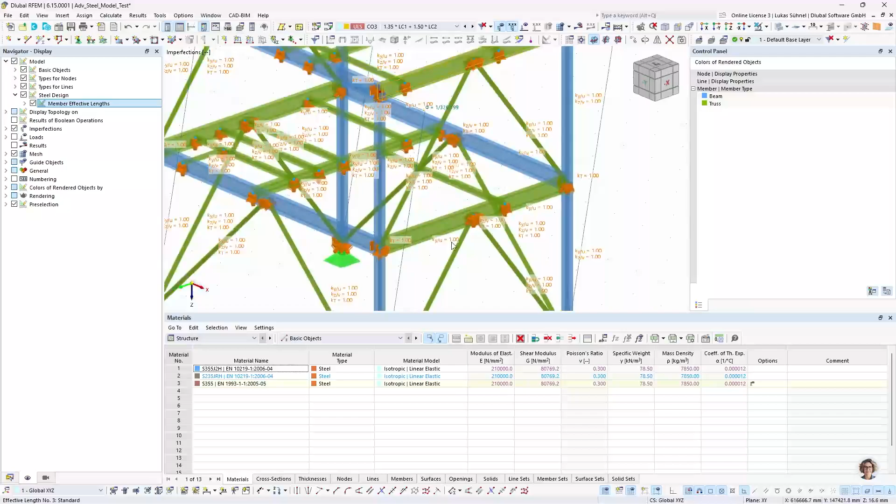Let me press OK and show maybe again the supports. So this one here and this one here, just graphically checking if it's on the right location. Yes. Here not yet, because I didn't assign anything here yet. So for this beam and one other beam, I need another design type. Let me input the amount of nodes. And here it's on the third intermediate node where I have the vertical support.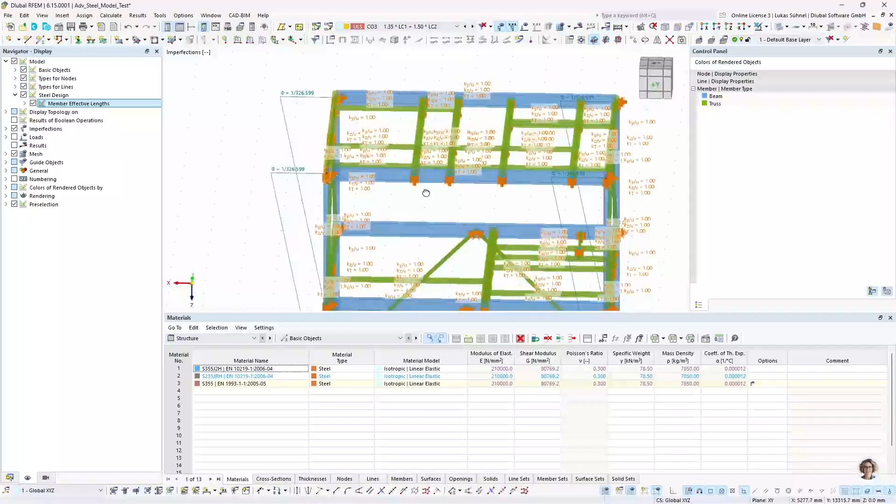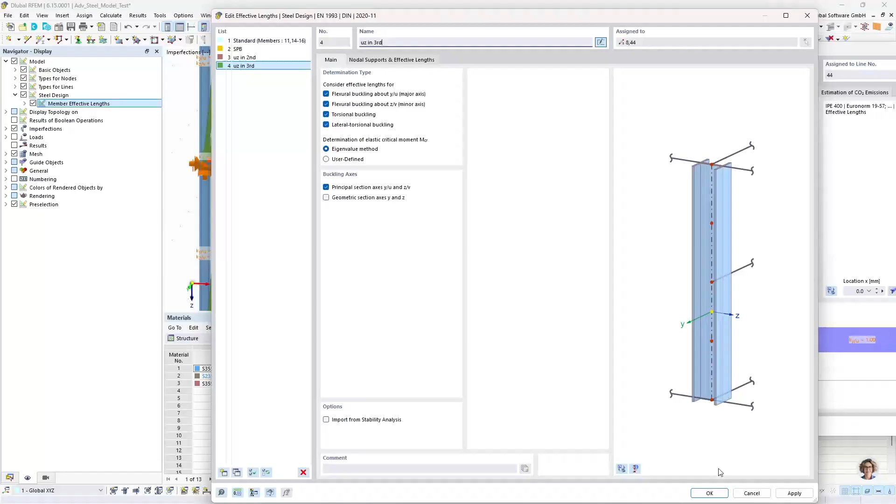Okay. Let me show the beam again. So now it's on the right location. And I think this member was also missing. I can assign this fourth method to it. Let's rename it so it's kind of logical: third. Okay. All right, now I should have assigned a stability related property to all of the beams. I assigned all of the buckling lengths and settings, and now I can run the steel design.

It will take a little second. All right, so this is the result. Let me change the rendering a bit again. Like this. Yeah, there are now different options how we can show these results. Maybe like this. So we can see there are a couple of design checks getting closer to a design ratio of 1. Here, 85%. But still everything is fulfilled.

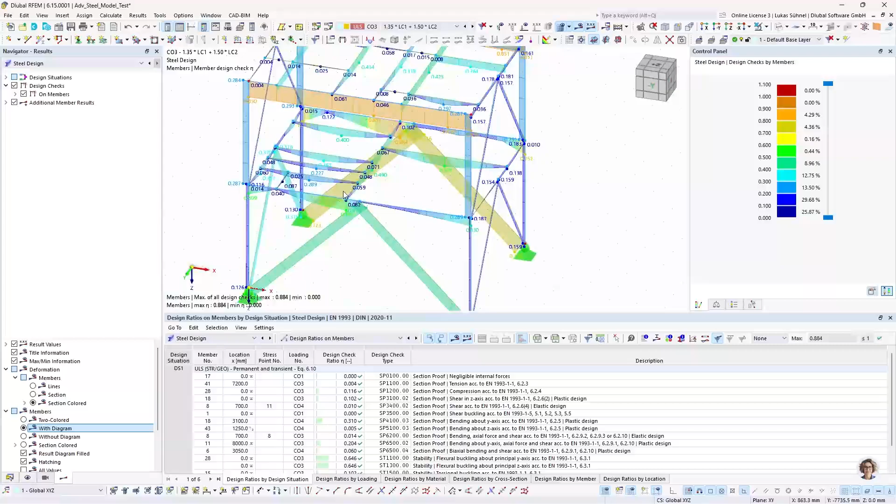So there's no need for me to consider the additional crossing beams in my stability analysis. It is okay as it is. We can also check the details of the analysis here in the tables. For example, design ratio by members. And if I select the member here in the graphic, it will directly jump to the member in the table.

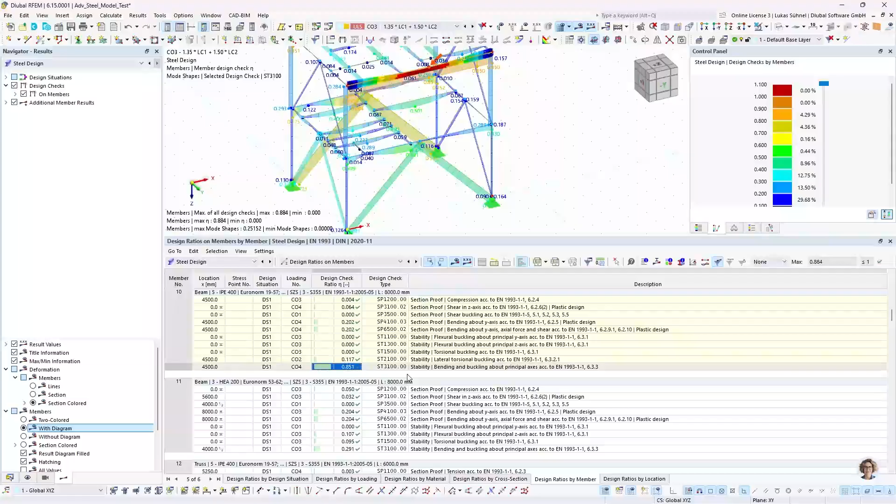I can double click here on the results and I get my intermediate results. So I can definitely calculate it by hand with the help of the formulas. So that's really a nice way to document the results. Okay. So far regarding this steel design.

Now there are additional add-ons that would help us to design the steel joints. Not help, they will design the steel joints. But I can't do it today. It will take too much time. So I will stop here. I will also not create a protocol, which is definitely included in RFEM 6. This has been shown in various webinars before.

I want to show now also the export from RFEM 6 into Advance Steel. So this is like a second use case. Let's assume you're a structural engineer. You have this project on your table. You calculated it, you designed it, and now the Advance Steel user should create the drawings and all these things. Then you can help him by sharing this structure with him via the SDNF format.

Obviously, IFC would also be supported. So let's check the options that we have. We can export it here, for example, in the IFC format or in the SDNF format. I don't know exactly how well Advance Steel can work with IFC files, if they can also convert IFC objects back into native objects. I didn't test that. But what I can say for sure is that the SDNF format is a really good option. And I will show it in a second.

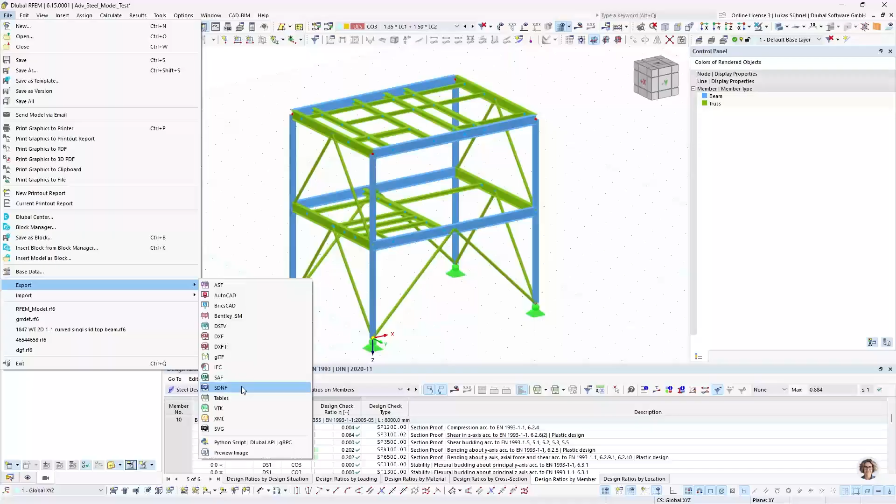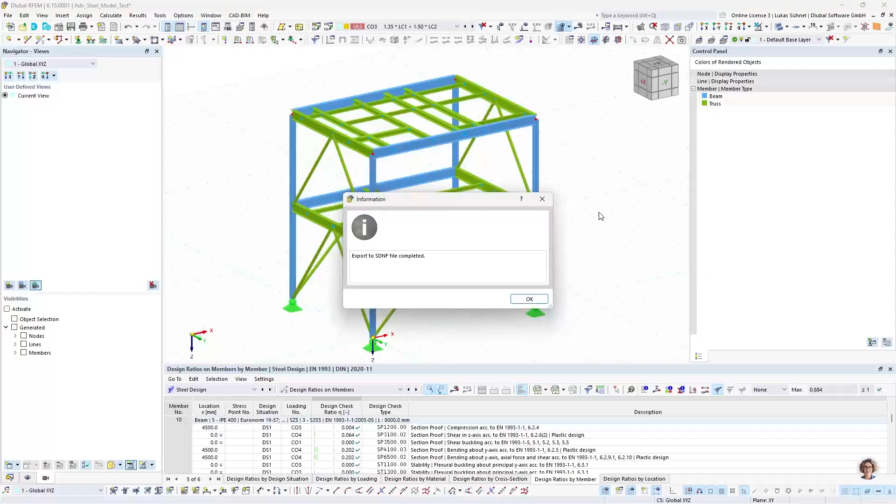So I will export this structure into an SDNF file. Just name it test, doesn't matter. Again, I will mirror it for the export, so it will not show up upside down in Advance Steel, and everything should be exported. Let's again wait a little second. Export is running. Okay, completed. And now I can go back into Advance Steel.

I will close this file here, the structure. I will create a new one. Okay. And then I can go into the menu export and import. I can switch here to import SDNF. I can select my little test file that I just created. General. Select an application. And now it will import the objects. I can choose my insertion point. Let me put it close to the origin.

And now this will show up for the first time. When you import it one more time, it will not show up anymore. It's basically similar to what we had in RFEM 6. You have to assign a proper Advance Steel section to the sections that we are importing from RFEM 6. So here I have an HEA 200 from RFEM 6, and I have to assign the Advance Steel section to it. So HEA 200, okay.

I have to do it a couple of times now. I'm sorry for that, but it hopefully won't take too long. IPE. Oh, HEA, sorry, my bad. HEA 140. Okay. May have a couple of sections, but not too many. IPE 400. Okay. 140. Okay. HEA 240.

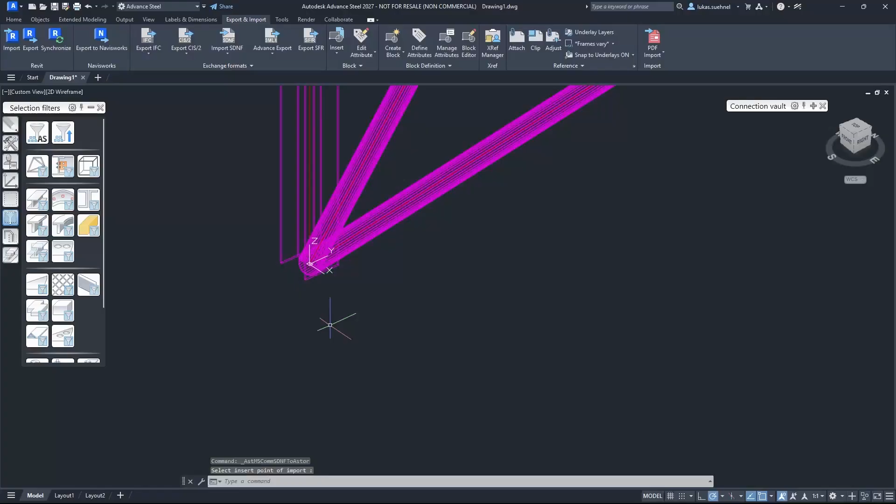My sections. I thought this was already the end of the list. Finally. Okay, so these are now the imported data. Again, we have to assign this section once, then it will save it in an internal mapping list. And if I import it one more time, we will get the structure directly.

So now let's show it in a shaded rendering. It looks quite good, yeah. It's similar to what we have in RFEM 6. And I can also show that it is quite usable in Advance Steel. So what do we get? We get also the center lines that we had before, these base lines, or how I called them, the red lines. But now it is not eccentric after the import, but I can quickly change it.

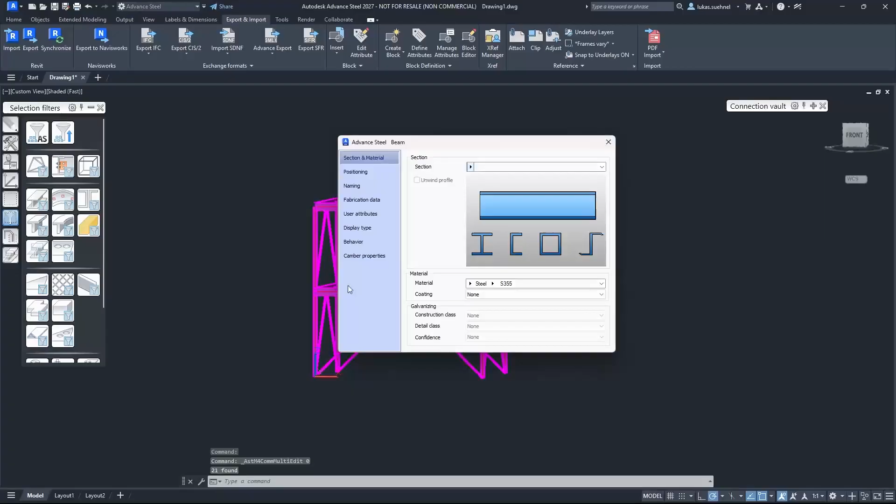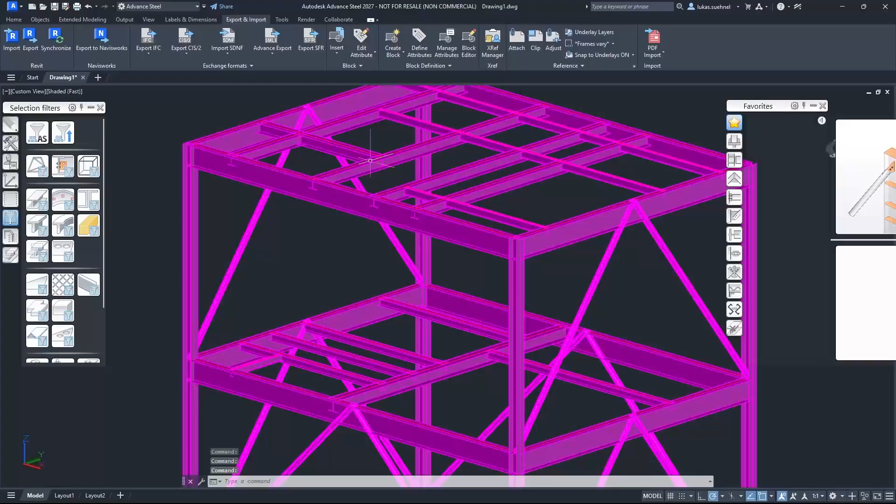I can simply select all these beams, go in the advanced properties, and I can say here, for example, please position it on the top flange. Same here. Advanced properties, positioning top flange. And then it's already in the right location. And I can also use it to assign connections here. So this is real native data that can be used with all the tools that we have.

And for example, I can create here these little connections between the crossing beams. So this beam and this beam. Then I should get a little dialog, clip angle. Let me not modify it too much. Looks strange here, I have to say. Was better in the German version. Maybe that's not ideal. I don't know why it's different. Maybe let's try something else.

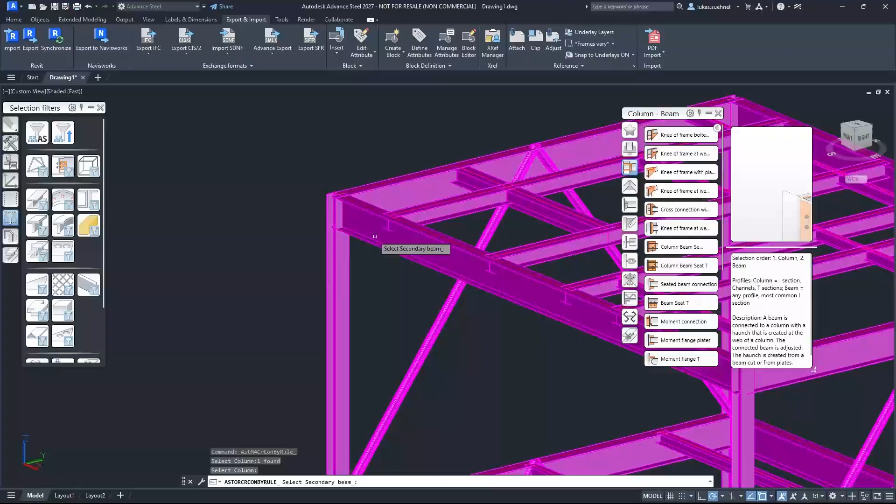What do we have in knee joint? So I need to select the column and the beam with the plate haunch. This looks much better now. I can modify the distances somewhere here. I think 12 millimeters for the horizontal distances. I can change the bolts here.

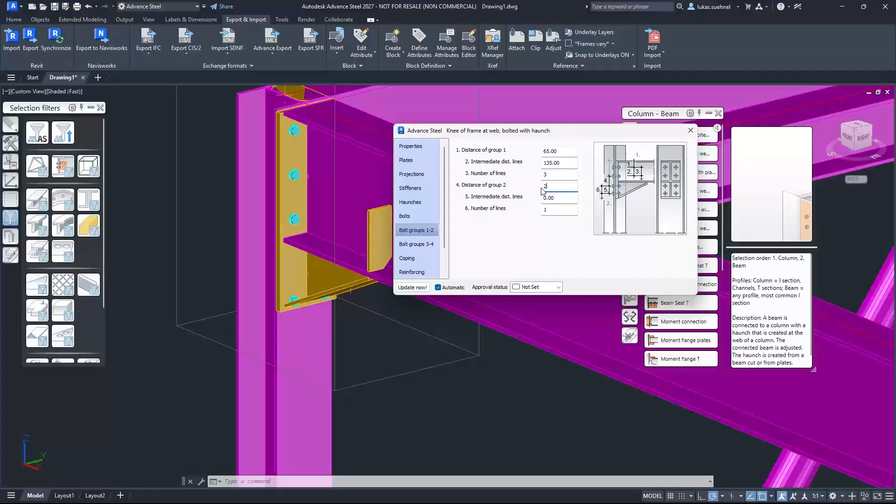Let's say I have 3 groups of bolts with a distance of 135, and then an additional row, which is then, that's too far, somewhere here, and then I have a nice joint. Just the stiffener here is on the wrong side, which I can easily mirror, and I can also say, please assign this joint on other locations, and then we quickly generate connections in here. So I can use these imported beams directly in these advanced tools. So this would definitely be a help for the Advance Steel user, I would say.